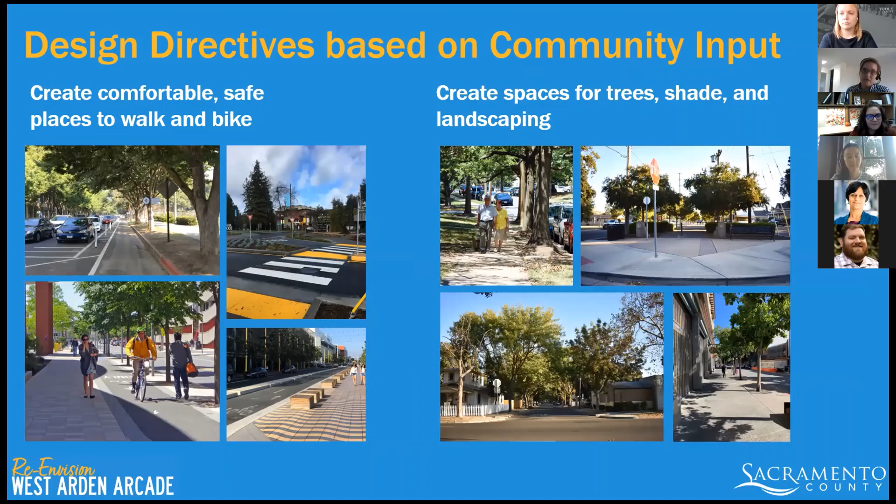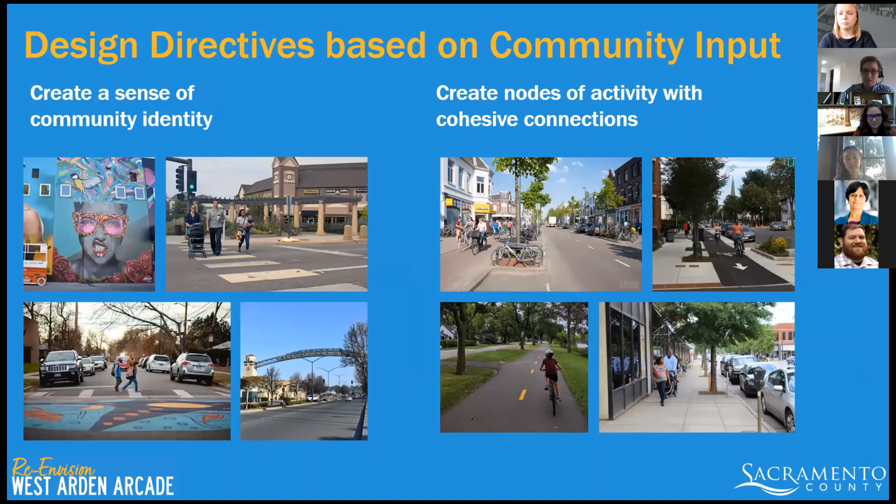Based on all that input, we like to talk about design directives for our team. We heard loud and clear the importance of creating comfortable, safe places to walk and bike, creating spaces for trees, shade, and landscaping throughout the community, and creating a sense of identity and nodes of activity with cohesive connections. You'll see when we jump into the work, this has really influenced our initiatives and thoughts on different types of corridor improvements and land use improvements.

The first thing we did was develop what we call a place-based network of streets to improve access — and by access, I mean not just motor vehicle access, but access for pedestrians, cyclists, and people taking transit. So we broke this down into different types of corridors: prosperity corridors, neighborhood greenways, and parkways. You can see here what we're thinking in terms of which would be best as prosperity corridors.

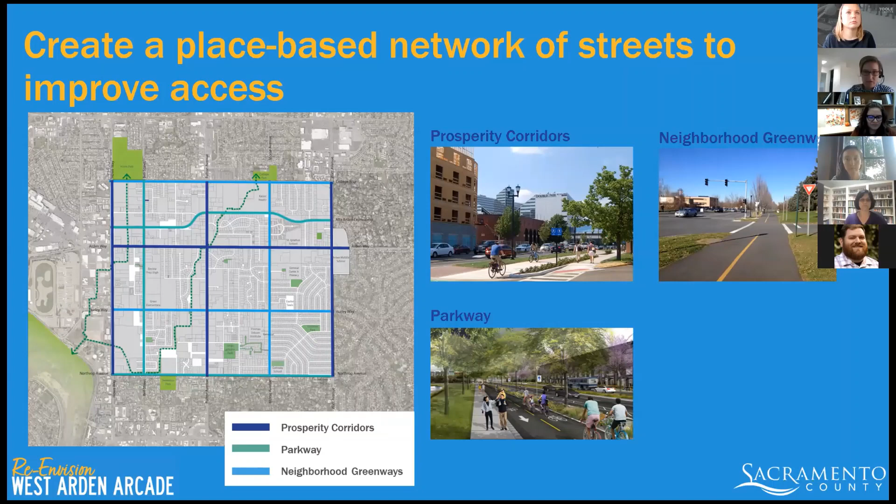That's Arden Way, Watt, and Howe, breaking it down into a finer grain with the neighborhood greenways and the parkways as well. We can talk more about this in our small group activity as you jump into that.

We also looked at community destinations, so identifying what's there, what's existing, and some of the main destinations within the community and just adjacent - a number of your schools, the different parks, important service places like Kaiser Permanente and recreational amenities. The idea is to really overlay and create additional nodes and corridors, how we stitch those together.

We looked at the potential of creating community nodes, mixed use sort of town center nodes, and then also neighborhood nodes. Matali will talk a little bit more about that when we jump into the land use discussion.

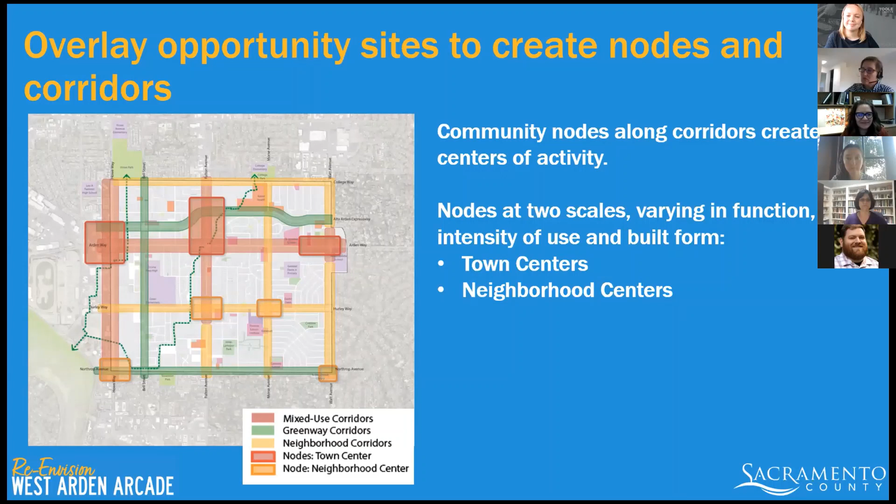So just a sense of where we're at in the project. What we'd like to do right now, it's about 5:20, so I think I'm on time or ahead of time, which is great, is have two really great conversations around two topics. The first one will be focused on transportation, and then the second one will be focused on the built form. I just want to do a little bit of quick overview of how this is going to work.

Ian Lockwood, who's the principal in charge on this project, is going to talk about just a basic intro to the transportation discussion and what we want to hear from you tonight. So I'll pass it off to him in just a minute.

We'll break into small groups after that presentation by Ian, and then we will have a small group facilitated activity. Then we'll come back together as a large group and have an opportunity to report out together so we can hear what each of the small group sessions talked about. And then we'll have Matali from Opticos Design talk about some of the built form aspects, and then we'll do the exact same thing in that small group.

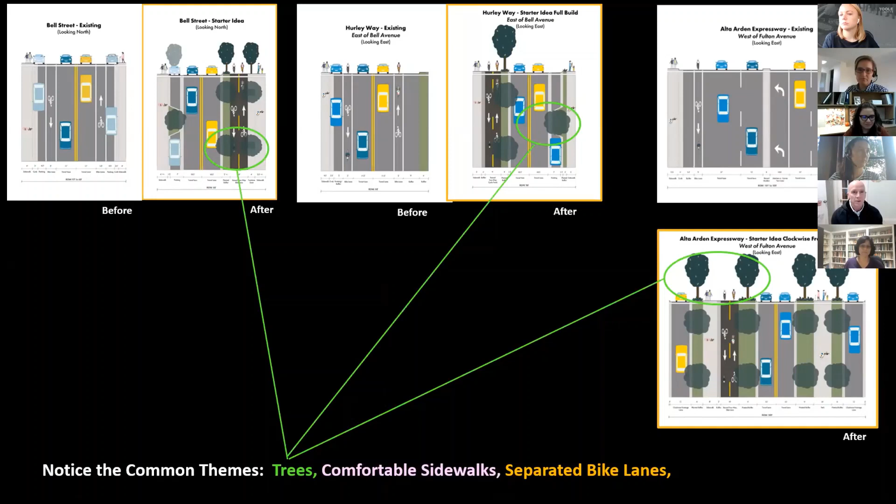You can see for all three before and afters for Bell Street, Hurley Way, and Alta Arden Expressway, that they all have trees in the after photographs. They all have comfortable sidewalks. And lastly, they all have separated bike facilities.

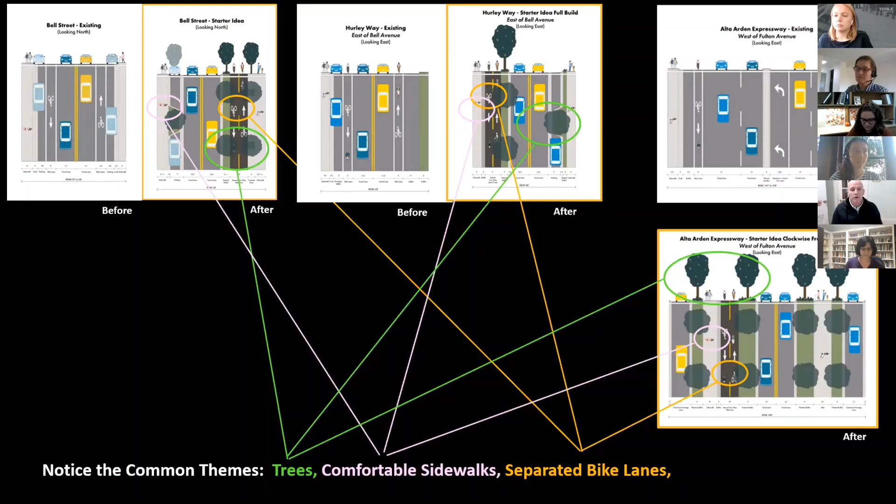So what we're trying to do is show you examples of how we could change the arterials in your network to better serve you and reflect your values. So that's what we want to look at when we move into the examples. And then there's lots of things that we're calling spot treatments.

These are things like crossings, intersection designs, bulb-outs so you can see both ways before you cross the street safely, mini circles, and all these sorts of little things that you can populate your intersections and neighborhoods with to make life easier and more comfortable.

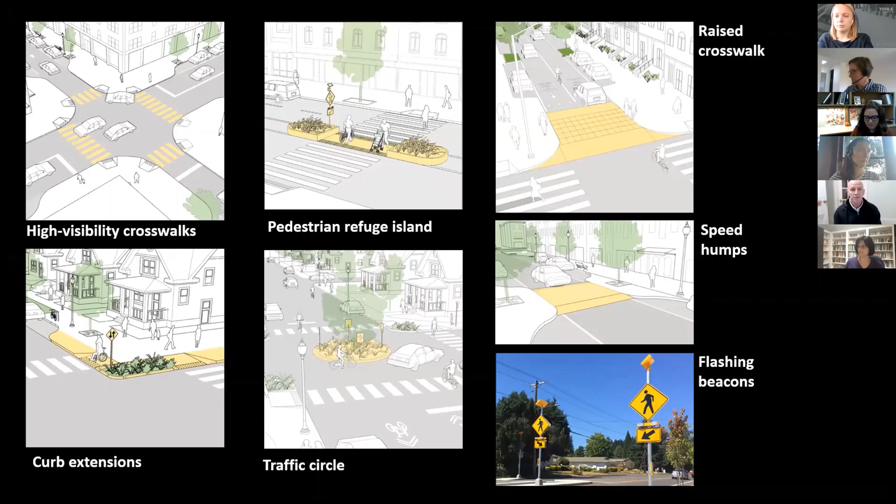Short trips involve going to your homes, going to school, going to the businesses throughout your community, going to the recreational areas, going to your parks, not just by car, but by bus and all these different modes. And what we're trying to do is change the arterials to really support those vulnerable modes.

There's a few questions we can ask ourselves about travel speeds. On the arterial streets, do high travel speeds benefit the community? Do they benefit the businesses? Of course, the answer is no. Slower speeds benefit folks in terms of safety and access to businesses, reading signs, turning into parking lots, and that kind of thing.

Do crossing locations matter? Do you want many crossing locations so you can cross the street to get to your neighbor's place or to a business, a restaurant, something like that? So we want plenty of crossing locations so your streets are permeable.

Shade came up so many times when people are walking and cycling. Does shade reward short trips or transit trips? Oh, sure it does. When you're waiting for the bus in the sun, it's just not comfortable.

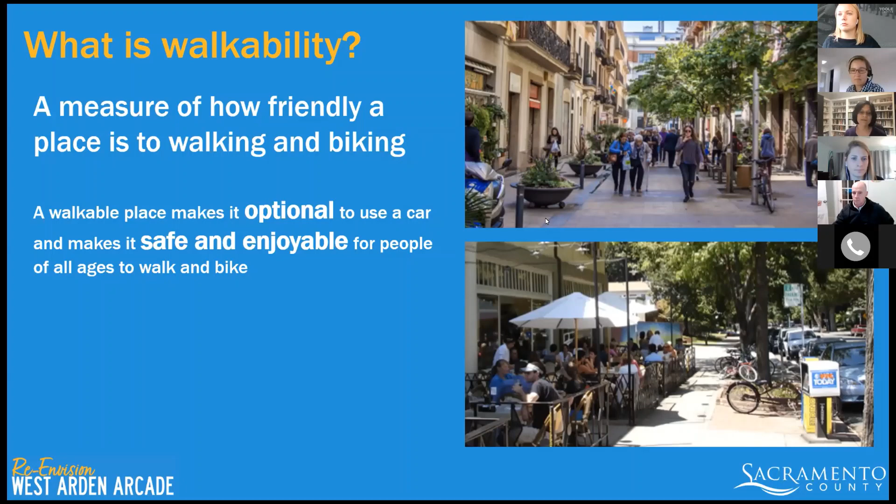So this needs to be a walkable place that is safe for everyone, and we're talking about the most basic needs on a day-by-day basis. It should be safe for children, safe for people of all abilities, and safe for people to comfortably and safely carry out daily errands.

Underlying that is this concept of a 15-minute neighborhood. This schematic graphic shows what different components need to be part of a neighborhood so that people actually feel motivated to do a lot of walking and biking in their day-to-day lives, including neighborhood schools, neighborhood grocery stores, playgrounds, and comfortable, inviting streets.

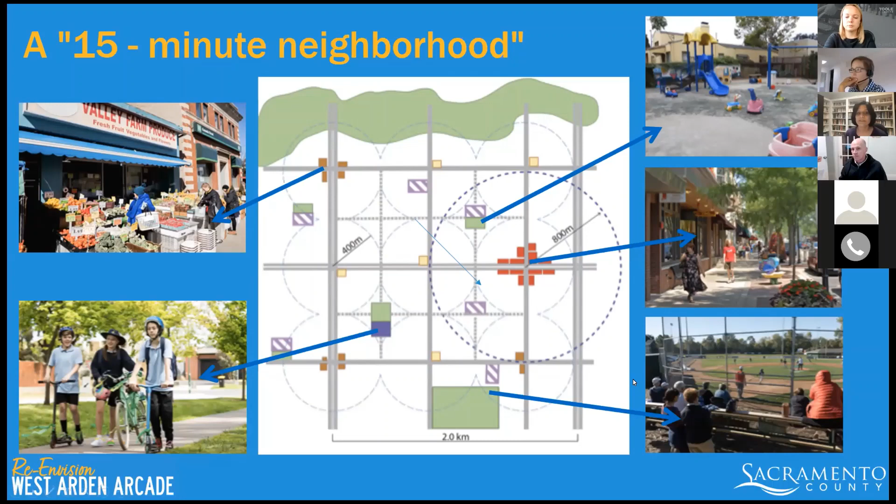When we take a look at West Arden Arcade, this is a map we produced at the Discovery Week in August. In it, we mapped all the community amenities, meaning all the places where people like to go—not just local parks, but also schools, popular destinations, and employment hubs such as Kaiser, a local Target, and a local grocery store. These were the places that emerged, everything colored on the map.

There were also some destinations just outside the project area. So all the components we talk about in terms of making this a 15-minute neighborhood, a genuinely walkable place, are already there. All we need to improve are the connections and make it more enjoyable for people to walk and bike. In a way, this can be the perfect neighborhood, which many other places really lack, especially single-family neighborhoods.

So one question is, it's all about ultimately slowing down traffic and making it easier to walk and bike. So why is built form important? It's not enough to design the street itself—it's also very important to design the interface between where the asphalt ends and the private property begins, and what the facade and frontage of the building look like alongside that public realm.

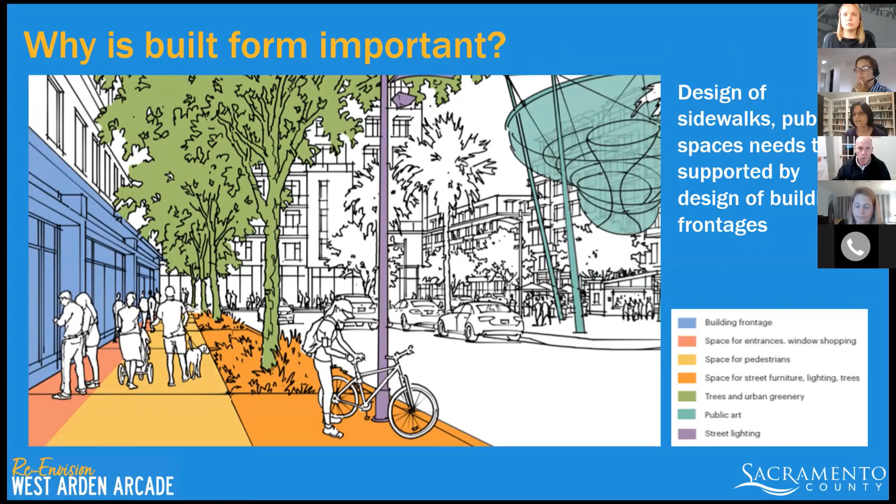As you can see here, it's all color-coded—the different elements that must all work in harmony to make a place truly walkable.

Here you see again the role of the built form. There are subtle differences, such as how close buildings are placed to the sidewalk, what the height and form of the buildings is, where the entrances are located, and what the ground floor looks like. All these aspects help make the sidewalk active and well used, or not.

So the way people perceive an area isn't just about whether traffic is moving more slowly. It's about how they feel, how comfortable and safe they feel, and whether it's an enjoyable experience to be walking next to the buildings—that's what we need to be thinking about.

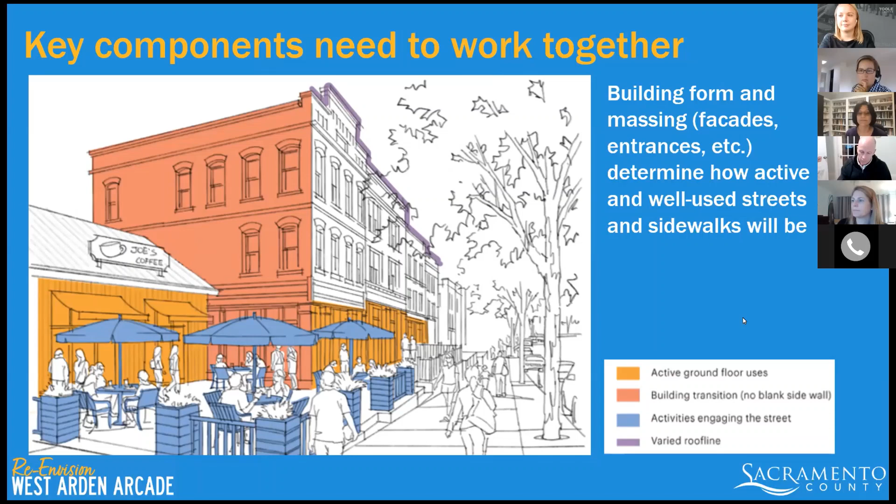In the first design workshop in August, which Cindy also discussed earlier, we looked at the concept of different types of nodes and the corridors in between. We found two main categories—these are similar kinds of places, mixed-use nodes, but the intensity of users, the built form that emerges, and the intensity of traffic would vary depending on the kind of node.

So we came up with this map, which shows the two types of nodes that could develop within the project area: town center level nodes, which are more community-serving, and at a more local level, the neighborhood center nodes, shown in the lighter color.

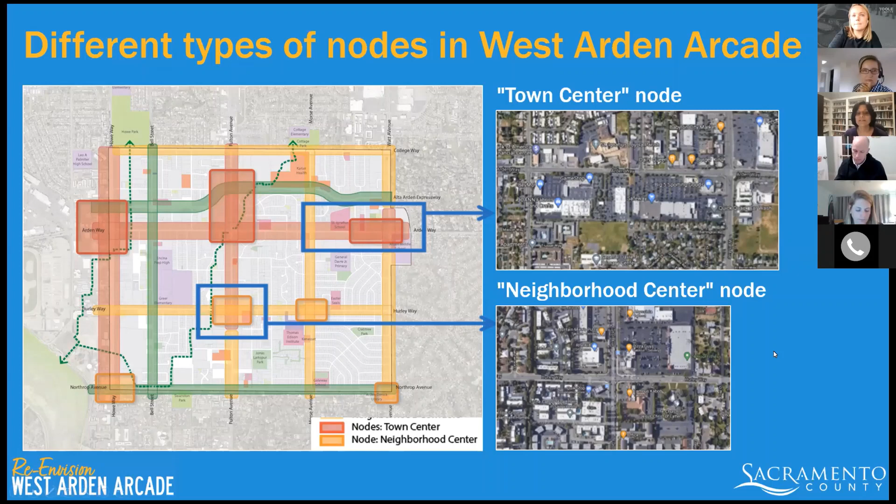As part of the charrette over the next two to three days, we'll be taking a deeper dive into design for two of these nodes. Our example for the town center node is that stretch of Arden Way between Watt and Morse, shown in the blue rectangle. We're also looking at the Fulton and Hurley node.

This is nice to think about as a long-term strategy, and some changes would take a long time since we're talking about privately held parcels and private development—no one is recommending demolition in the near future. These parcels will develop over time. So what can we do in the near term versus the long term? In the near term, we can think about a variety of low-cost, quick-build improvements.

Similarly, we need to rethink our relationship to parking. Parking is very important. It's required for businesses, but at the point that it starts dominating and taking over what is public space, I think there's a problem.

So let's think about what's possible, whether temporary or permanent, by utilizing the parking space that already exists. Here you see some examples of parklets. They can be quick, temporary transformations just to test out ideas.

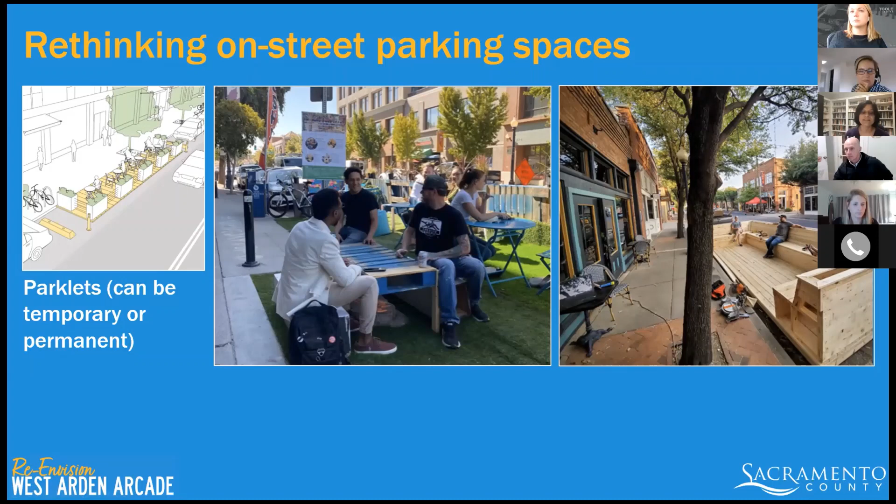Or we can apply the same logic to parking lots. There are a number of parking lots within the project area. As this example from Milwaukee shows, if it's not fully utilized, if there's a lot of vacant space available, why not take a corner and try something different with it? It's not going to be expensive, just something temporary. If it doesn't work, the paint will eventually wash off. But this is a great way of testing out ideas and building a sense of community.

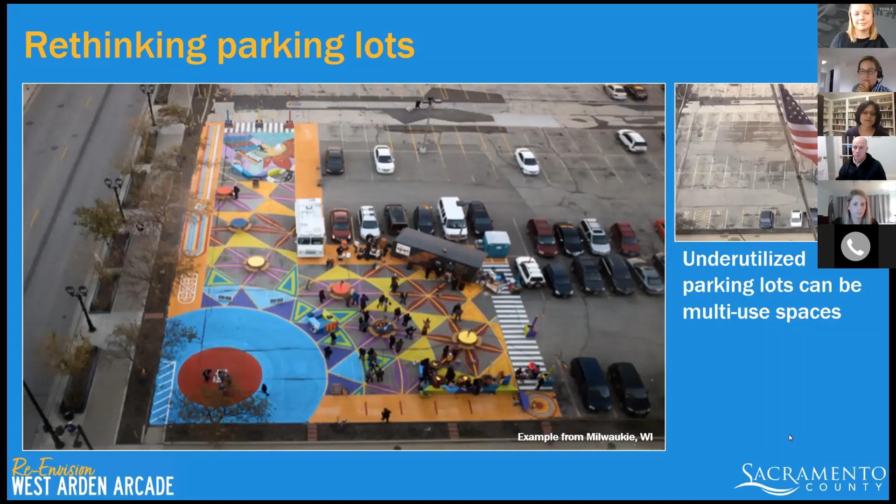Parking lot transformations aren't a breakthrough idea at this point. People have been experimenting all over the country with quite a lot of success. You can have weekly markets, a weekly food truck fair, even temporary games and activities, all low cost, quick and easy, but they all help create a sense of identity for places.

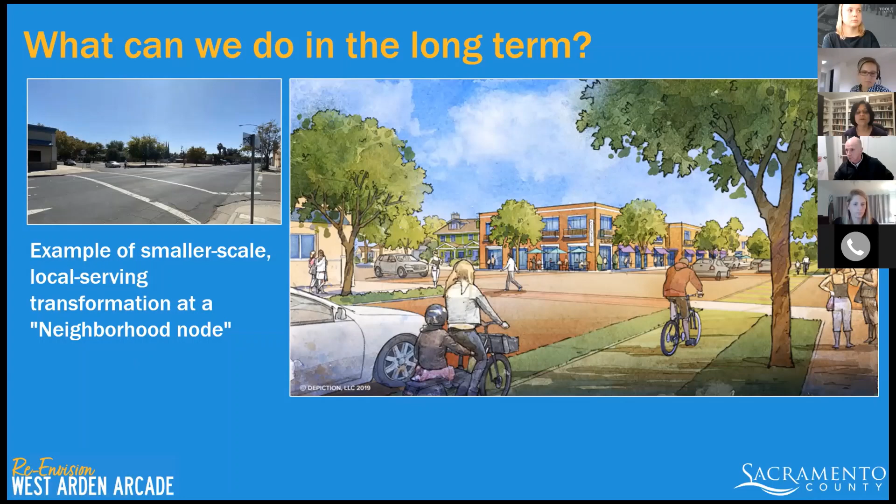At the same time, it's not enough to just do those, because we're also thinking at the neighborhood level. So we can think about smaller scale, slightly more modest transformations and smaller building changes. But all of these contribute to making neighborhood nodes really vibrant and supporting the community that lives there.